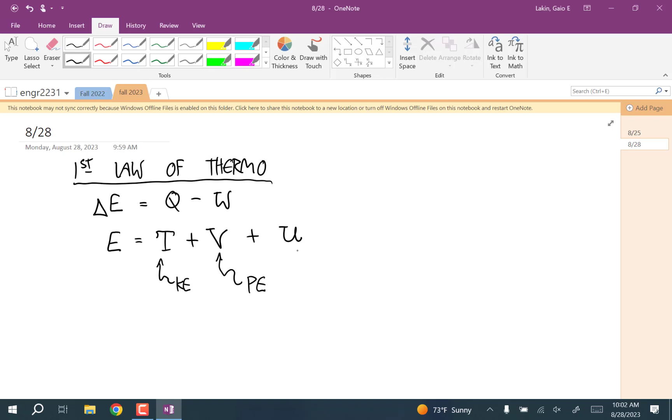Remember that E is equal to the kinetic energy plus the potential energy. This is the kinetic energy, this is the potential energy, and this is the internal energy. This has to do with just molecular motion. Often, the change in kinetic energy and the change in potential energy are going to be small, and we're going to ignore them.

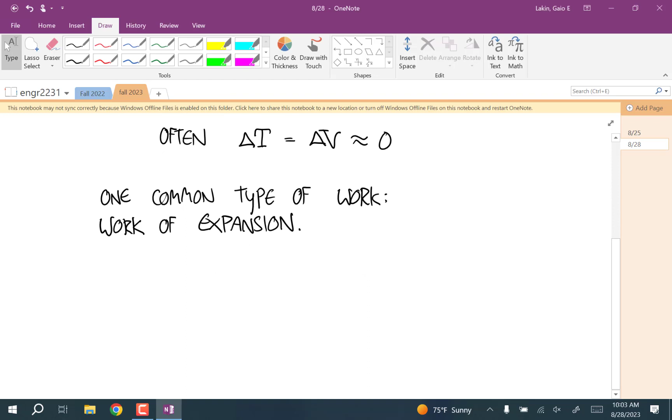One type of work that we're going to see all the time is the work of expansion. If your system expands, it does work on the surroundings. Think of it this way: almost all the time, everything that we're doing, we can think about as happening in a piston and a cylinder.

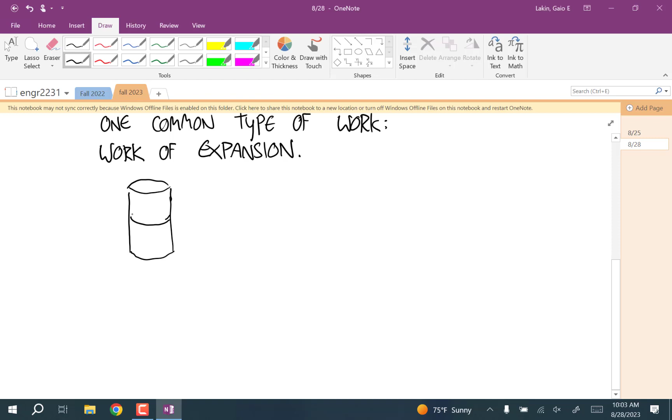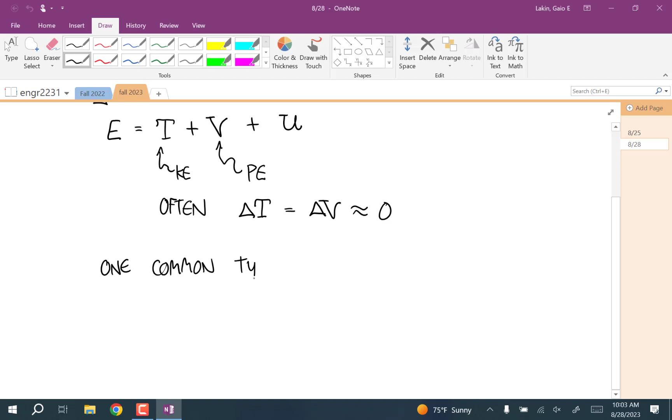Okay, one common type of work is the work of expansion. So if you think of a piston in a cylinder, this is the gas that's our system. If that gas expands, that piston rises, and that does work on the surroundings. If the surroundings push that piston down, then that compresses the gas. That does work on the system from the surroundings, and that would be a negative W. So if the gas expands, W is positive based on our sign convention. And if the gas contracts, is compressed, then W is negative.

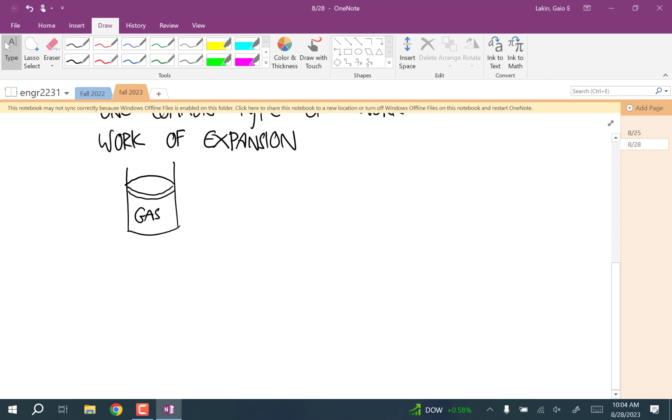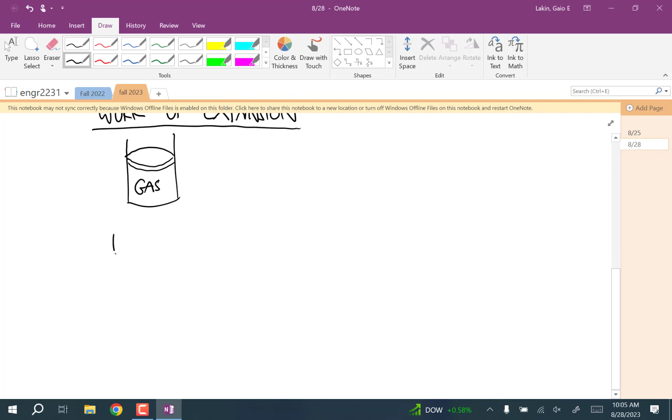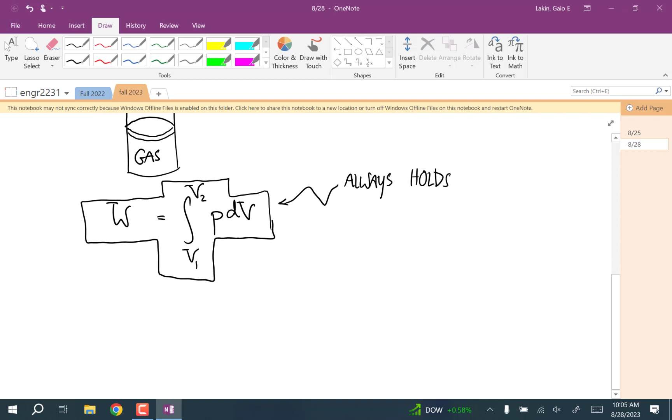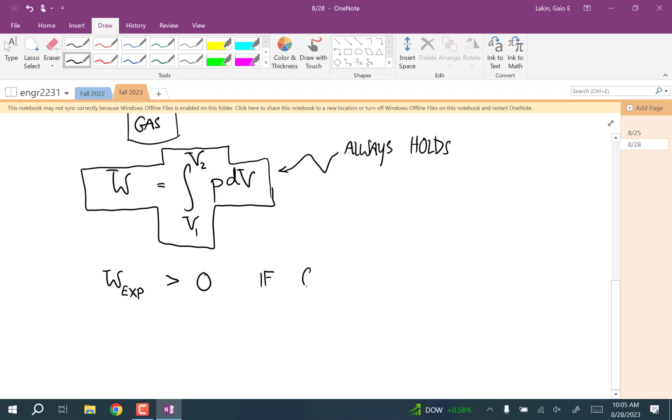The work of expansion is given by the formula: work is equal to the integral from the starting volume to the ending volume of P dV, pressure d volume. And this will always hold. Notice that the work of expansion is positive if the gas expands.

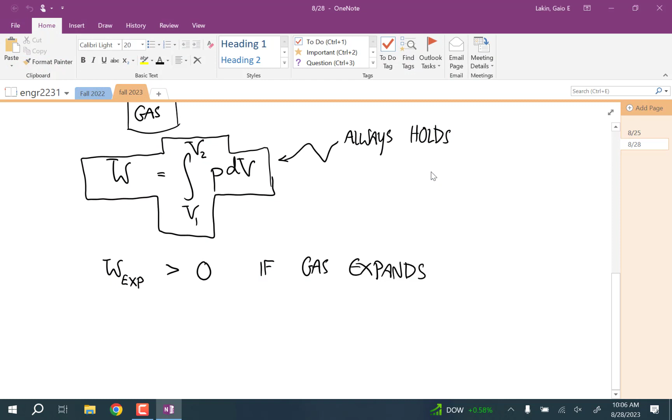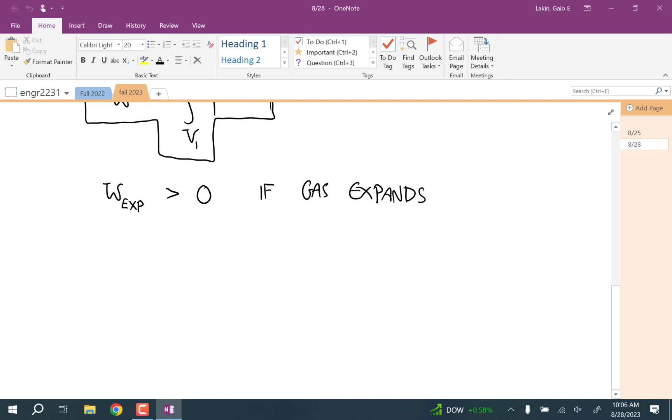Well, we'll see. Okay, so the work of expansion is 0 if the volume is constant.

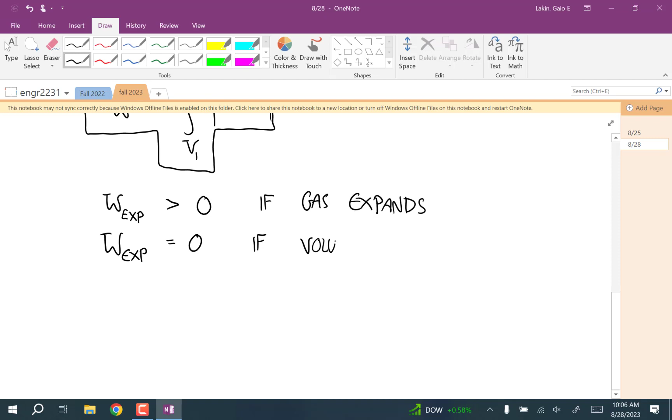And the work of expansion is negative if the gas contracts, if the volume gets smaller. You can just see that from the form of this integral. Pressure is always positive, you can't have a negative pressure.

In the assignment I gave you last time, you had to do that thing with gauge pressure. But in all of these kinds of calculations, in all the formulas, we're talking about absolute pressure. Remember the gauge pressure thing in the assignment that I wrote? In gauge pressure, you can have negative pressure - you can evacuate a chamber, and then the pressure inside the chamber is negative compared to 0 at atmospheric pressure. But in absolute pressure, you could have 0 pressure if there are no molecules of gas inside there, but you can't ever be negative. So this pressure is always 0 or positive.

And so you can just see what happens if it expands. You're integrating a positive thing from a smaller volume to a bigger volume, and so on. You can just look at that formula and see the way that works.

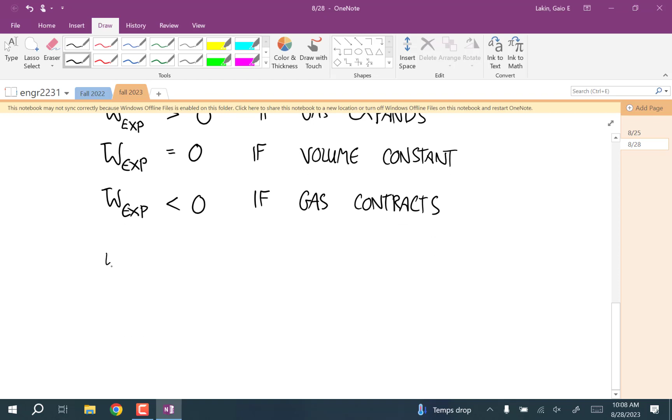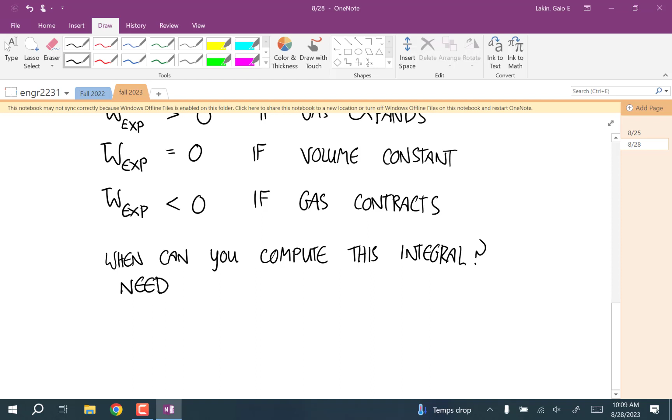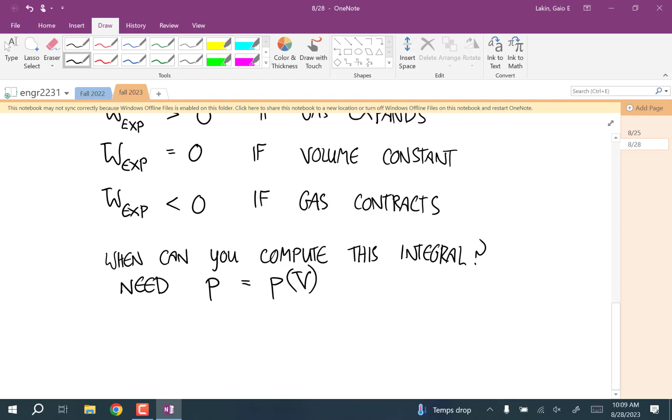Okay, so you're not super used to taking integrals with your independent variable being volume. When can you calculate this integral? When can you compute this integral? In general, the answer is you need to have P, pressure, expressed as a function of volume. The easiest case is when the pressure is constant.

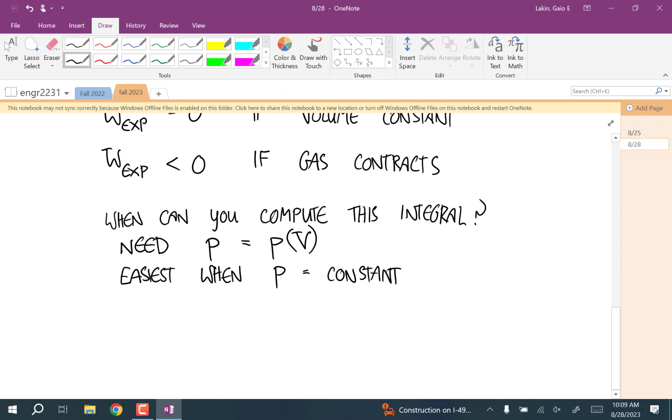So now this seems like an okay time to talk about how, throughout this class, we do calculations where the pressure is held constant, the volume is held constant, temperature is held constant. Later on we'll get things like no heat transfer and stuff like that. So let's think about how those things happen physically. Mathematically, yeah, let's say the temperature is constant - but how would you really set something up to make that happen? So, experimentally, how do you hold variables constant?

The easiest one is holding volume constant. You just use a fixed tank. This is for a gas. Any gas that you use is going to expand to fill whatever tank it's in. So if you have a fixed volume for the tank, it's holding your volume constant.

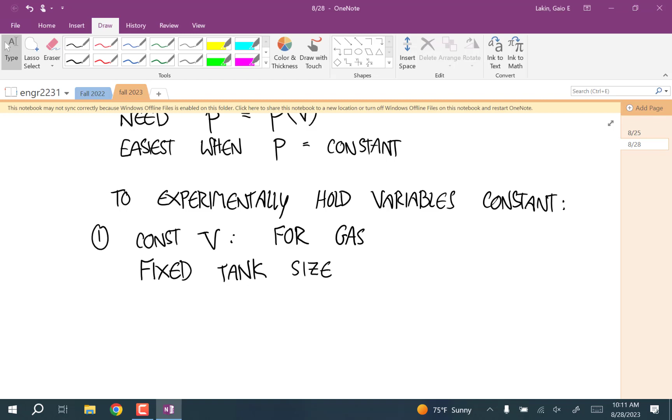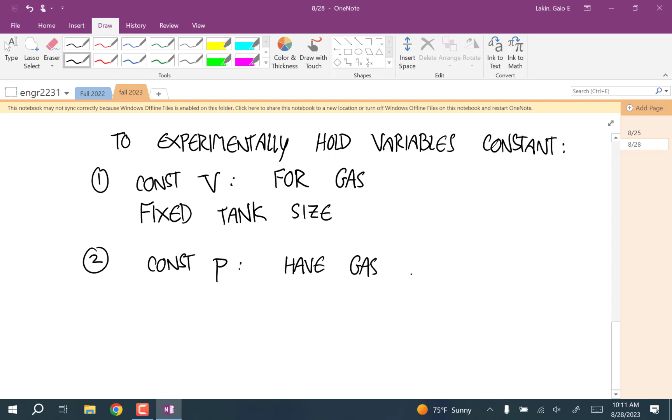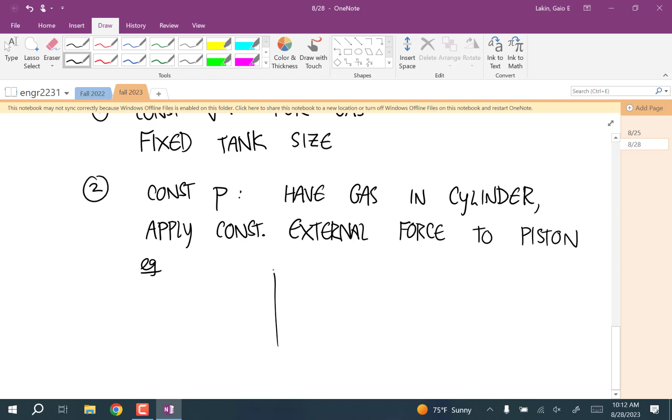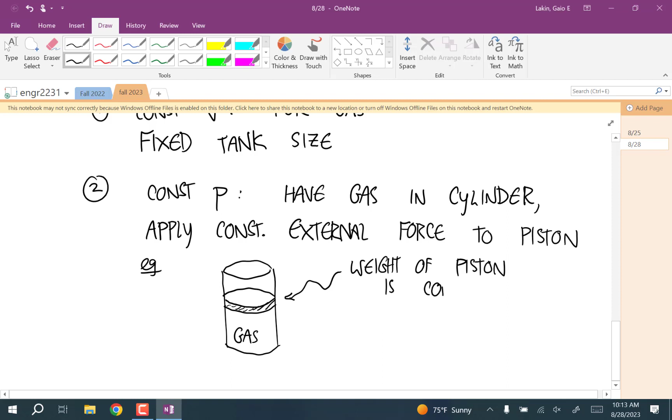To hold pressure constant, imagine having your gas in a cylinder and apply a constant external force to the piston. One example of that would just be using the weight of the piston. So for example, if this is your cylinder and this is your gas, the weight of the piston is the constant force. So that gas, depending on what happens to it, can expand or contract. But the whole time, the pressure it's fighting against comes from the atmospheric pressure and the weight of that piston, and those will be constant even as that piston is going up and down.

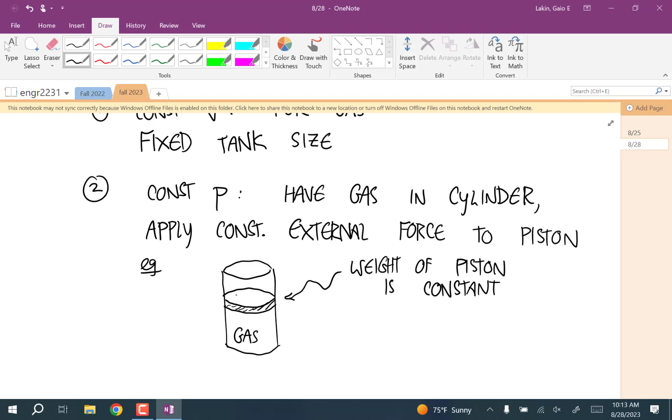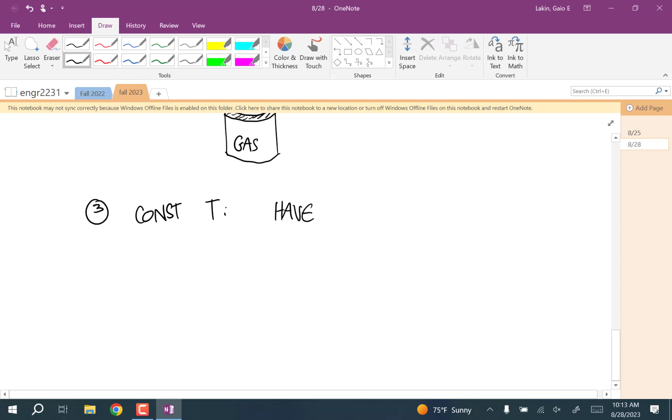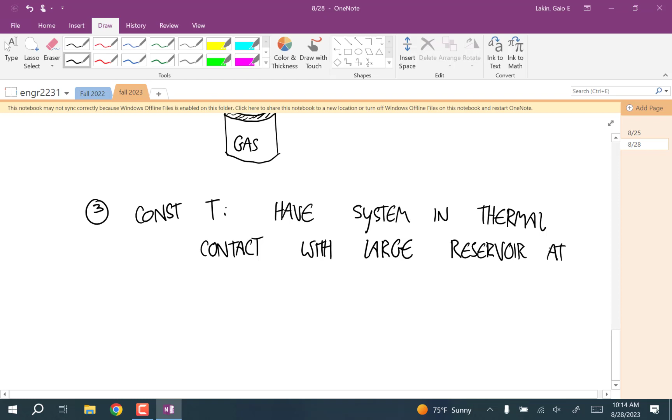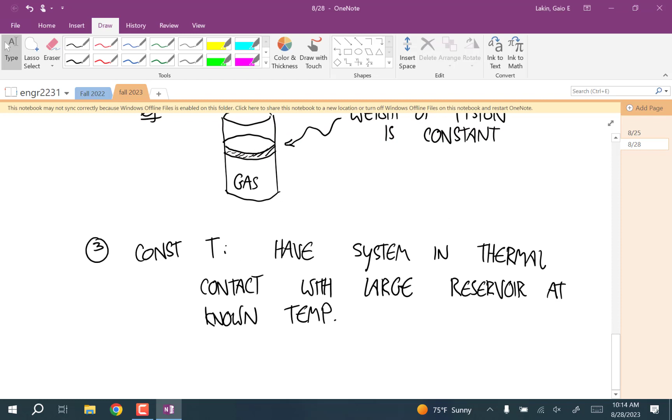And then the last one is to hold temperature constant. Have the system in thermal contact with a large reservoir at a known temperature. So think about what would be an example of that. You could think of it again as a piston and cylinder. Think about having the piston made out of a material that transmits heat easily, and you do your experiment slowly enough that heat can transfer back and forth as the temperature in the gas starts to rise or lower.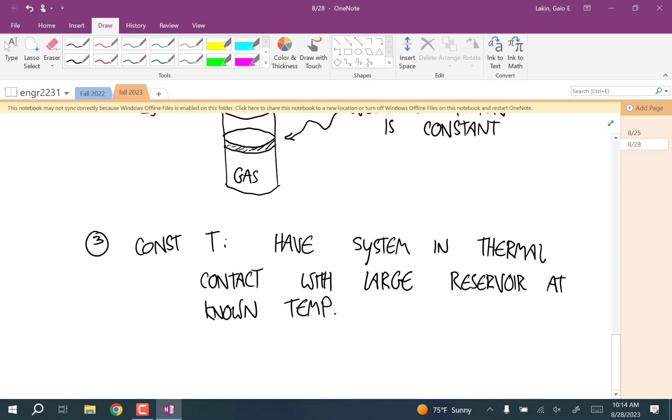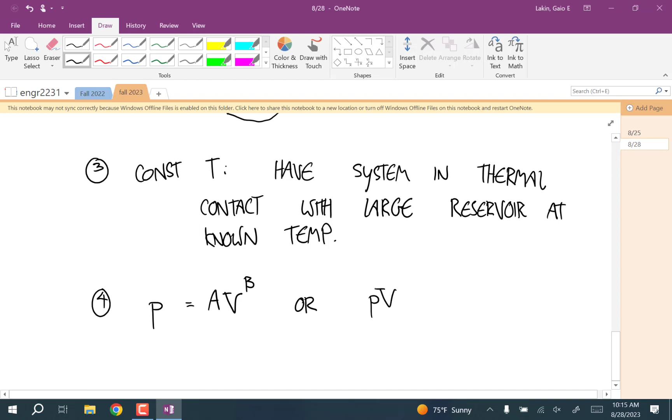And then the last thing, this isn't really constant, but we will see this from time to time: cases where the pressure is equal to some constant times the volume to some exponent, or it can also be expressed as P times V to the something equals a constant. These are just different ways of writing the same relationship. But what's going on in cases like these? Remember that these are just representing experimental findings for one specific type of process, for a specific process.

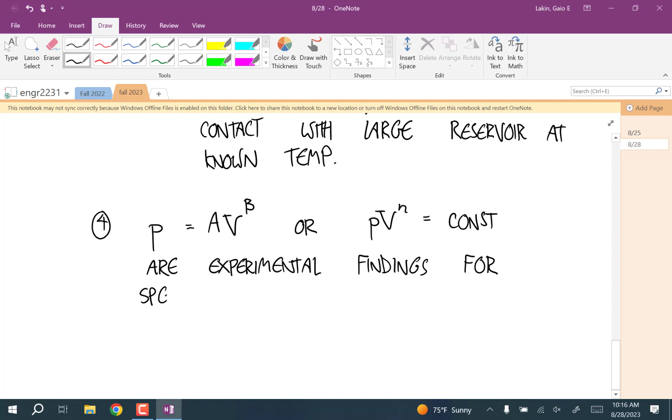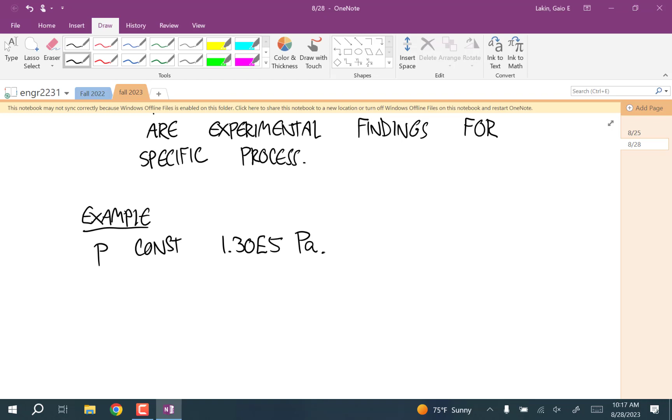Okay, let's do some example problems, just to get used to using the work of expansion formula and the first law. First, let's say that the pressure is constant at 1.30 times 10 to the fifth pascals. How do you hold the pressure constant? The cylinder or piston is able to move, and the weight of the piston is holding it down. Right, or any other force, as long as something is applying a constant force, like 5,000 newtons, that's fine too. Weight is one way to do it. And 1.3 times 10 to the fifth pascals, is that higher or lower than atmospheric pressure? Higher, a little bit. Yeah, 1.01 times 10 to the fifth is standard atmospheric pressure.

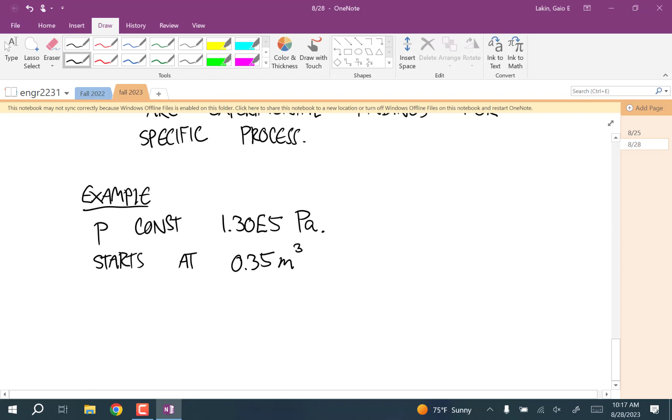Okay, so let's say that the volume starts at 0.35 cubic meters. Then the temperature is reduced in the gas, in the system, and the volume decreases as a result. If the temperature in the gas is reduced, is the volume going to increase or decrease? Decrease, yep. So the volume is decreased to 0.20 meters cubed.

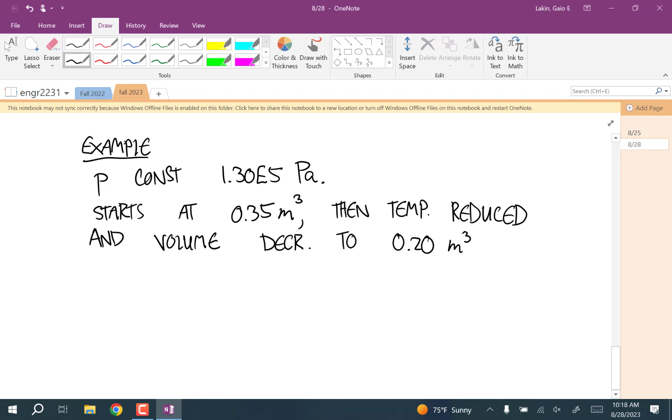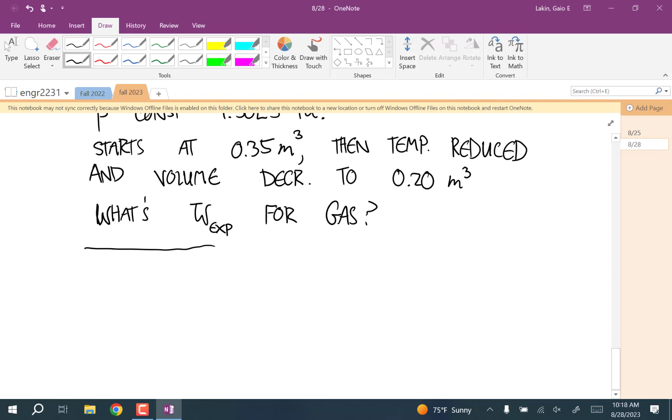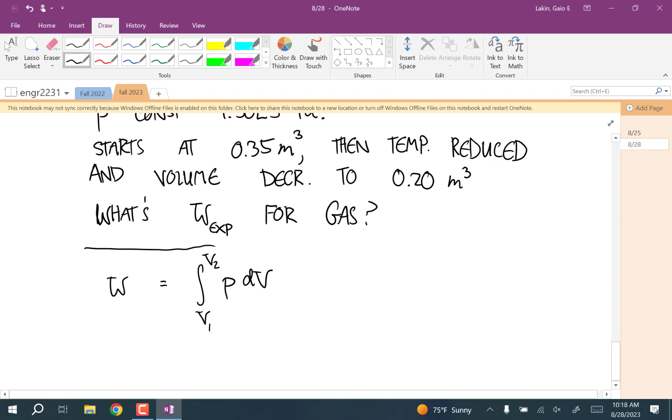What's the work of expansion for the gas? The formula says that the work of expansion equals the integral from the starting volume to the ending volume of pressure times dV. This is the easiest case because we have constant pressure. So this is going to be the integral from... nope, I did it backwards, the starting to the ending, so 0.35 to 0.2, of 1.3 times 10 to the fifth, dV.

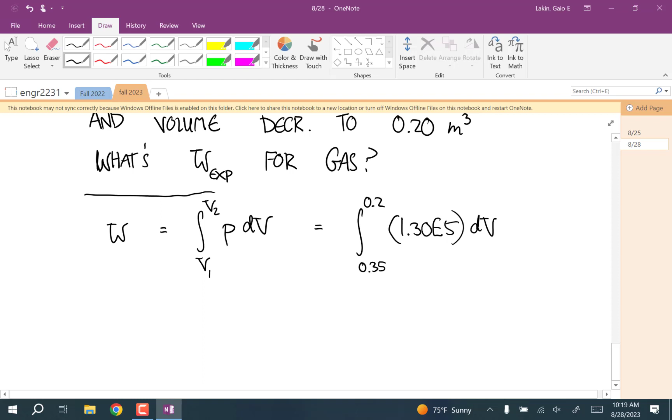So take that integral and you get 1.3 times 10 to the fifth times V, evaluated from 0.35 to 0.2, and you get a value of negative 19,500 joules. If everything you do is in SI units, this is going to come out in SI units, that's what I'm going to tend to do in this class. Okay, does it make sense that we got a negative answer? Yeah, because the volume decreased. That's always a negative work of expansion. Any questions about that process?

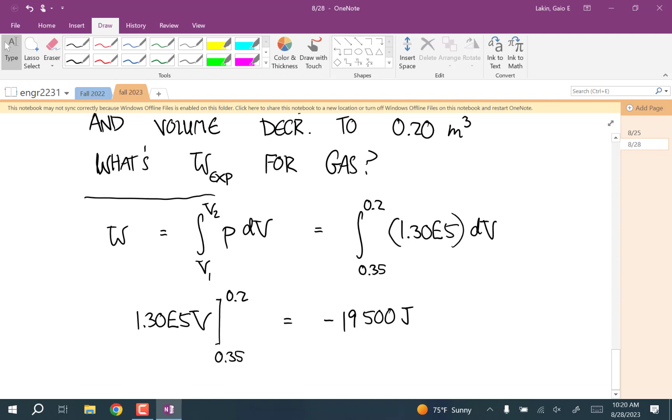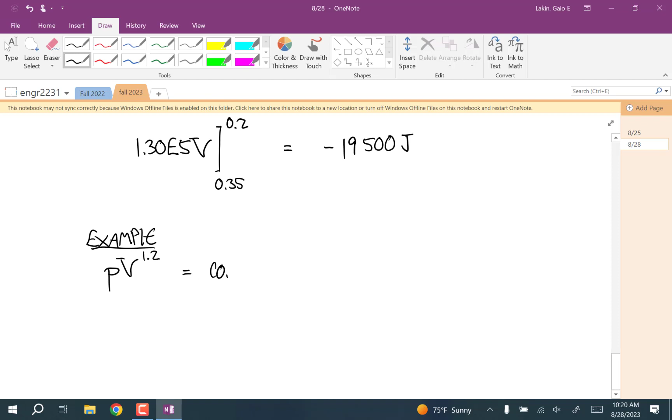Okay, so how about this one? Let's say that we know that during this process, PV to the power of 1.2 is going to be equal to a constant. At state 1, the starting state, let's say that the pressure is equal to 3 bar. 1 bar is 1 times 10 to the fifth pascals, so this is 3 times 10 to the fifth pascals. And at that state, the volume is 0.1 cubic meters.

And then at state 2, the ending state, we don't know what the pressure is, but we know that the volume is equal to 0.2 cubic meters.

What's the work of expansion? First, can we tell whether this is going to give us a positive or negative work of expansion? It's going to be positive because the volume increases. Well, so we know that P times V to the 1.2 is equal to some constant.

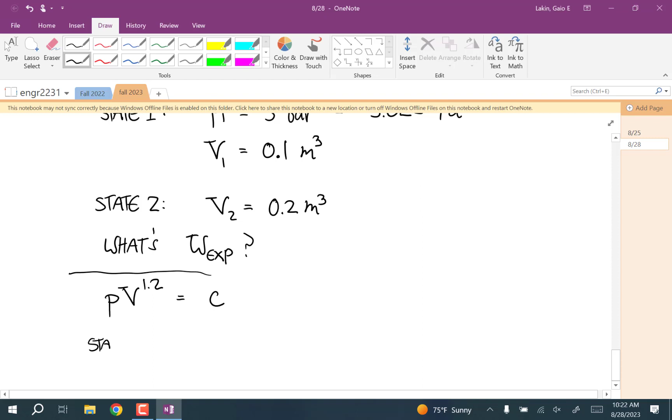I'll call it C. We don't know what C is yet. How can we figure that out from what we're given? From state 1, exactly. So state 1 says that 3 times 10 to the 5th times 0.1 to the 1.2 is equal to C.

Did I do this one? All right, so how are we going to solve this for C? Once we find C, then we know we can use this in the integral for work of expansion. Well, this is a pretty easy case. All we have to do is just calculate that number. So C is equal to

18,928.7. And so now we know that pressure times volume to the 1.2 is equal to 18,928.7.

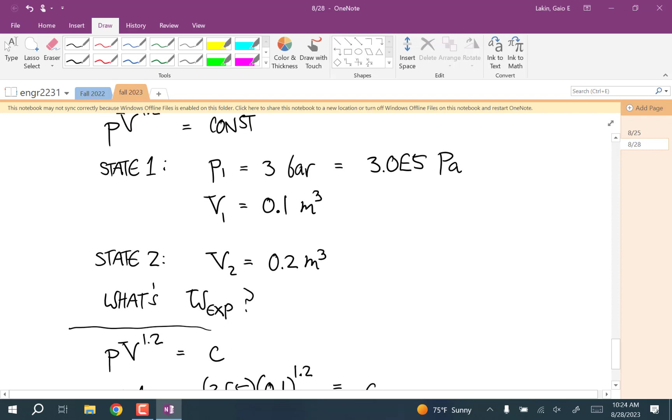Well, in order to use our formula for the work of expansion, what we need is pressure given as a function of volume. So now we can multiply both sides of this equation by V to the negative 1.2, and you get that pressure is equal to 18,928.7 times volume to the negative 1.2. You with me on that? Now we have our function, and so the work of expansion

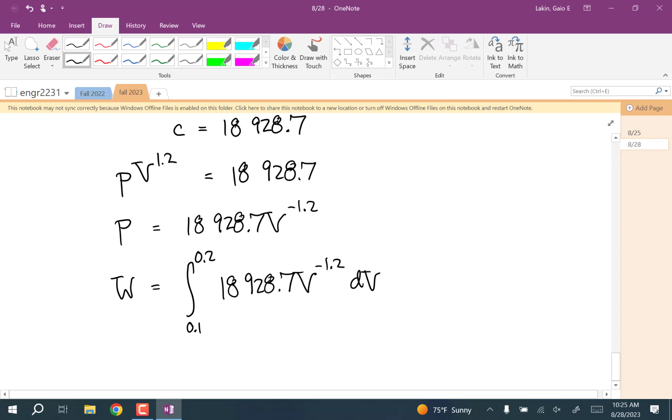is just going to be equal to the integral from our starting volume to our ending volume, so from point 1 to point 2, of 18,928.7 times volume to the negative 1.2 dV. You can pull out that constant, so this is just equal to 18,928.7 times the integral from point 1 to point 2 of V to the negative 1.2 dV.

And so this is equal to 18,928.7 times V to the positive, negative 0.2, over negative 0.2. So that makes this whole thing negative. Evaluated from 0.1 to 0.2.

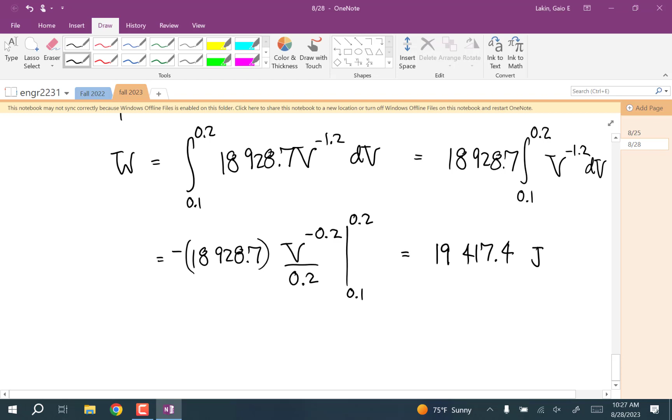And if you do that evaluation, you get, because this exponent is negative, you end up with positive 19,417.4 joules, which is a positive work that goes along with the expansion of the gas like we knew from the start. Okay, so practically speaking, you're going to have to deal with these exponent rules quite a bit on this kind of stuff.

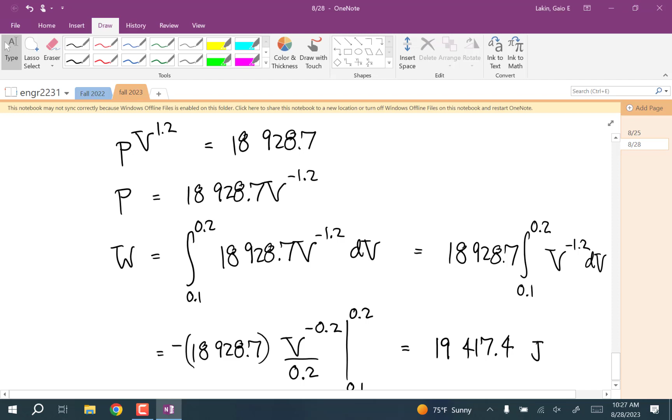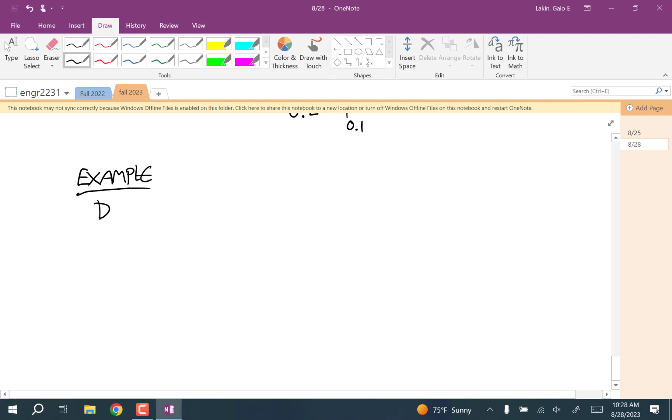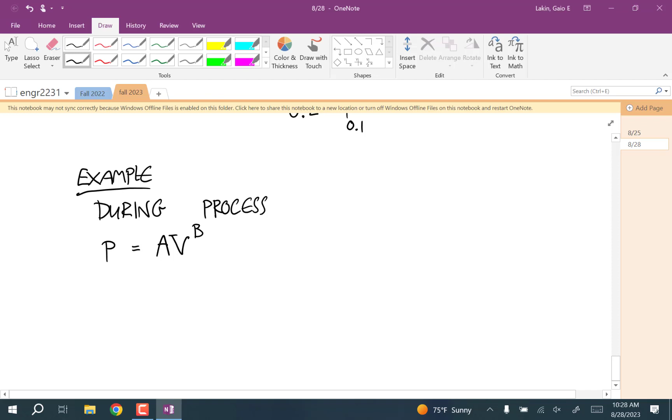Okay, so let's say now, let's do another one like this. Let's see. So let's say, wish I had them written out. So let's say that there's a process where we know that pressure is equal to some constant times V to some exponent, and 200 joules of heat is added.

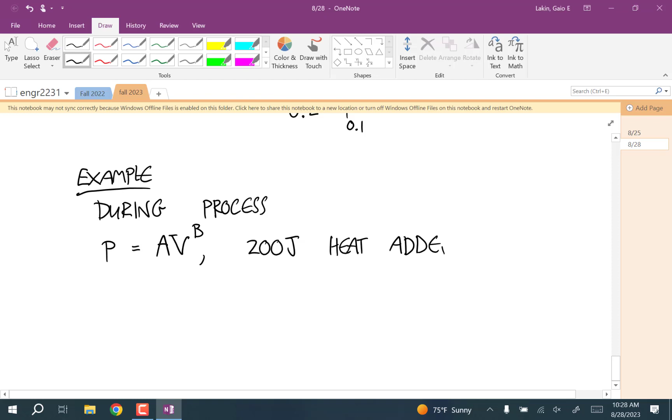And let's say that it goes from a pressure of 2 bar, which means 2.0 times 10 to the 5th pascals, and a volume of 0.3 cubic meters. And it goes to a second state where the pressure is 0.5 bar, and the volume is 1.5 cubic meters.

Let's say that there's no change in kinetic or potential energy. What's the change in internal energy of the gas?

Okay, so let's think through how this is going to go, and then step by step I'm going to give you time to work on these and see if you can get through them. In the last example, this exponent relationship between pressure and volume, we knew the exponent from the start. We just didn't know what the constant of proportionality was. This time there are two things we don't know. What's different about this problem setup that's going to allow us to calculate both of those versus just the one in the last example?

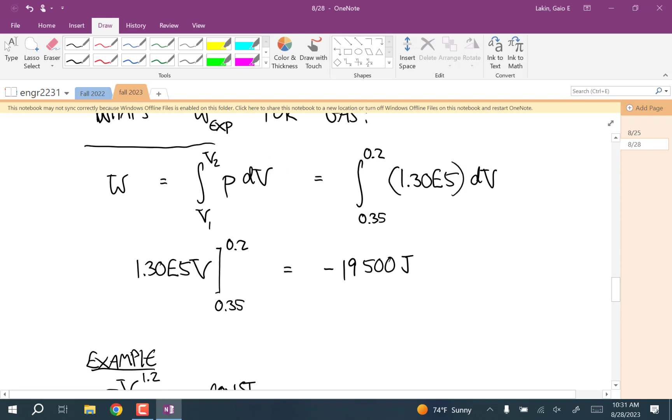There's one extra bit of information that we have here that we didn't in the last one. That's right, exactly. In that first example, we had the pressure and volume at state 1, but only the volume at state 2. In this example, we have the pressure and volume at state 1 and the pressure and volume at state 2. So the first step is going to be to find that relationship, to calculate A and B. Okay?

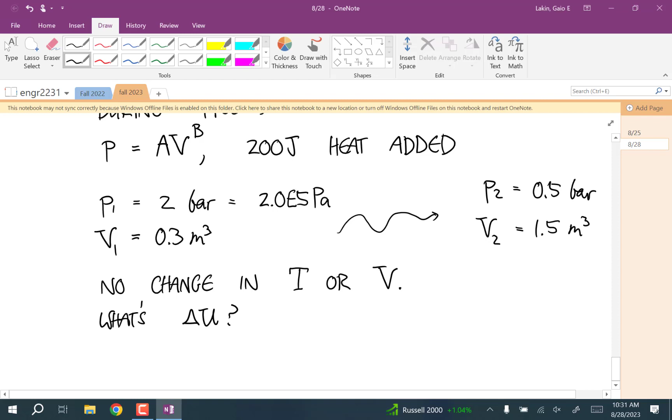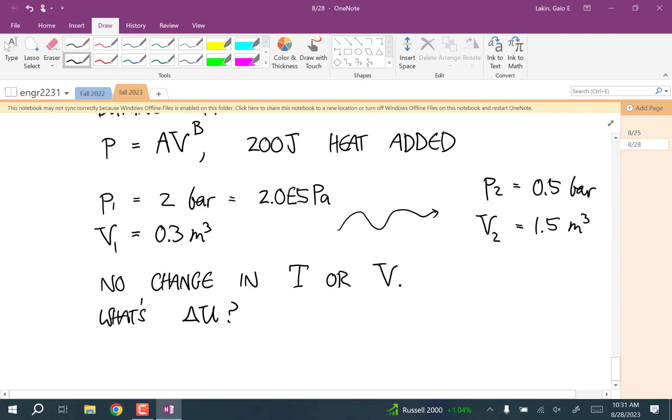After we do that, we can calculate the work of expansion. And after we calculate the work of expansion, we have everything we need to plug this into the first law of thermodynamics and find that internal energy. Okay?

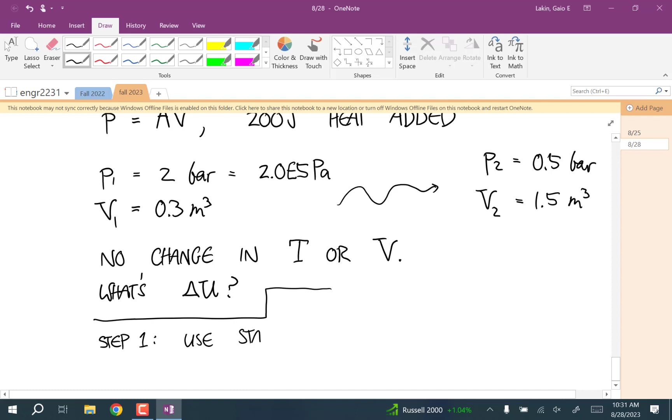So, step one, use states 1 and 2 to calculate pressure as a function of volume. Okay, take a few minutes and see if you can work through that. It won't be so bad, but let me just go through this first step. Okay, so we have that

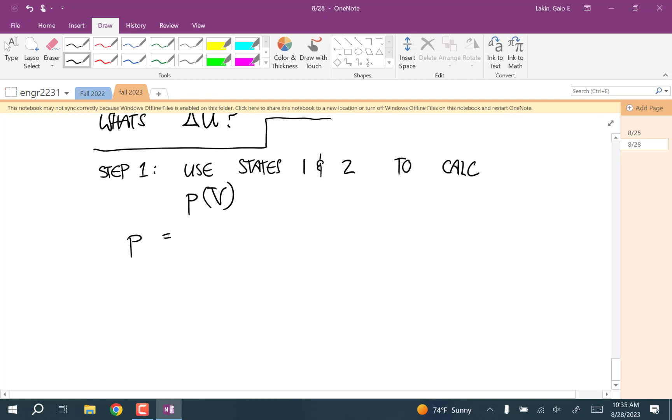pressure is equal to A times volume to the B. So A you can think of as, let's see, so A you can think of as pressure over V to the B.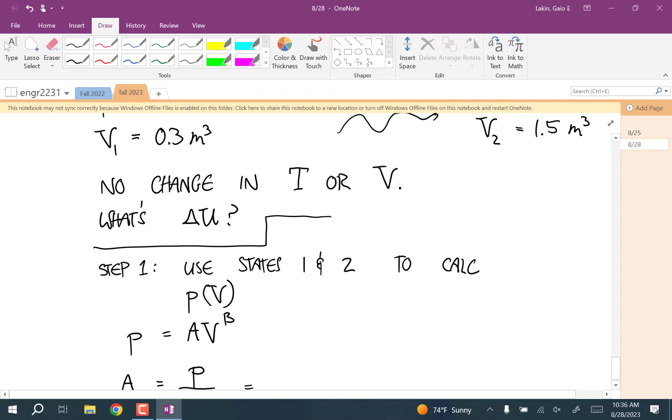And now we can plug in these two states. So the first state, A is equal to 2 times 10 to the 5th divided by 0.3 to the B. So this is from state 1.

And then at state 2, we have that A is equal to 0.5 times 10 to the 5th divided by 1.5 to the B.

And these two things are equal, so we can set 0.5 times 10 to the 5 over 1.5 to the B equal to 2 times 10 to the 5 over 0.3 to the B. Okay, so now we're starting to get somewhere.

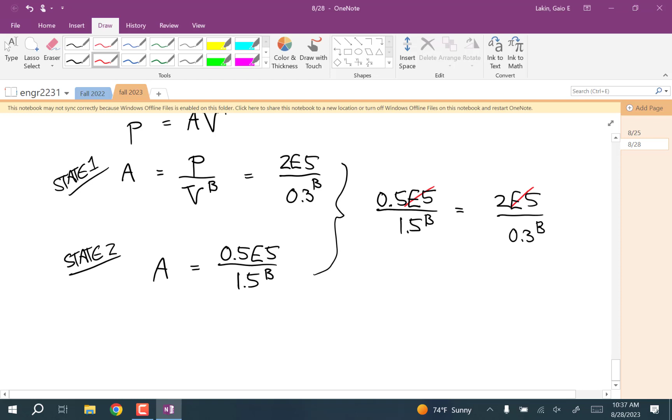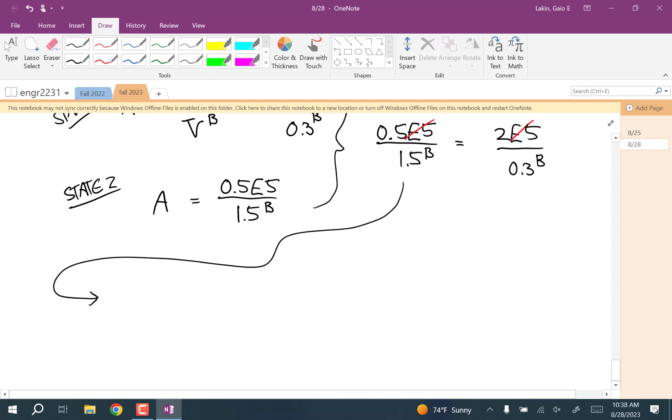You can divide both sides by 1 times 10 to the 5th. So now 0.5 over 2, we have 0.25 on the left side is equal to 1.5 to the B over 0.3 to the B.

And we can write this as 0.25 is equal to 1.5 over 0.3 all to the power of B. And so 0.25 is equal to 1.5 divided by 0.3 is 5.

Now you can take the natural log of both sides. And remember, the thing about natural log is the natural log of 5 to the B is equal to B times the natural log of 5.

So B is equal to natural log of 0.25 divided by the natural log of 5. And you get a value of negative 0.861. Okay.

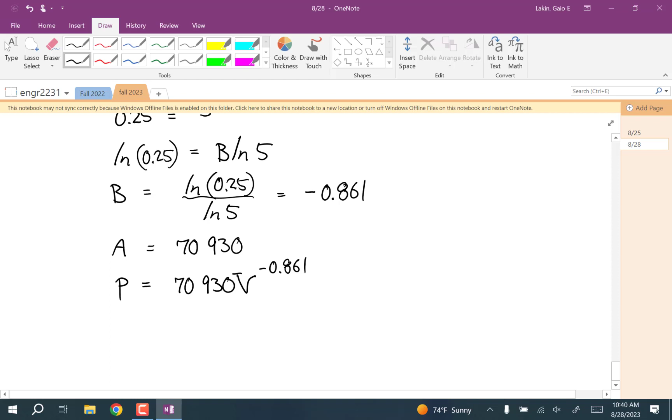And so pressure then is equal to 70,930 times volume to the negative 0.861. Okay, that step is out of the way.

The next ones are mathematically much simpler. So now take this and calculate, you know, the second step is to calculate the work of expansion by computing that integral. So take a couple minutes and do that.

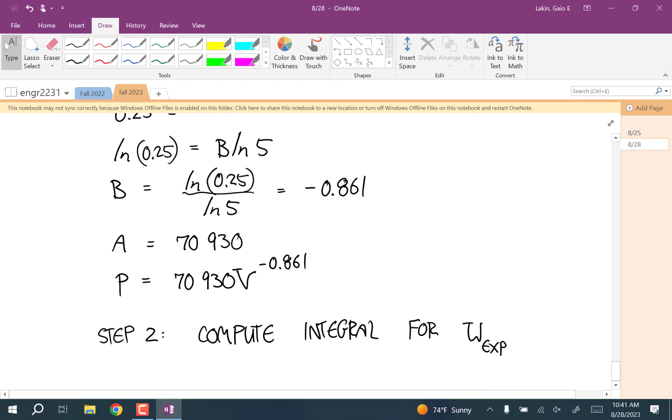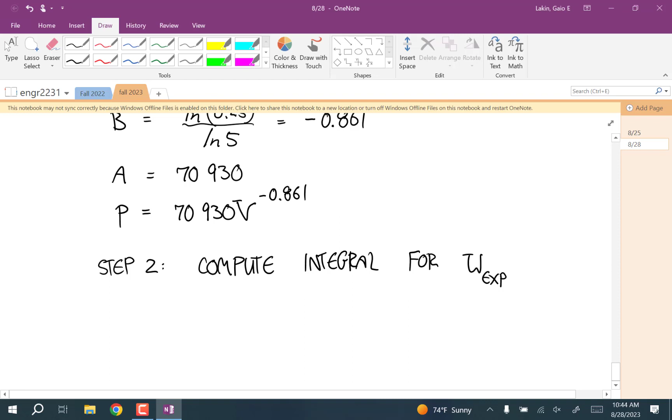And ask yourself, do you expect this answer to be positive or negative, first of all? That you can just get from looking at the volumes at the start. The volume's increasing, so this gas is expanding, and so we expect our integral to come out positive.

So the work of expansion is the integral of P dV. So I can write this as, I can pull out the 70,930 outside of the integral. And we're going from volume 1 to volume 2, so 0.3 to 1.5. All these are in SI units, remember. Times volume to the power of negative 0.861 dV.

And so this is equal to 70,930 times volume to the power of positive 0.139 divided by 0.139, evaluated from a volume of 0.3 meters cubed to 1.5 meters cubed.

And if you evaluate that, you get 108,181 joules. Did anybody get that? Good. A little bit off, but I kept the... 0.23. Okay. Yeah, right. Great.

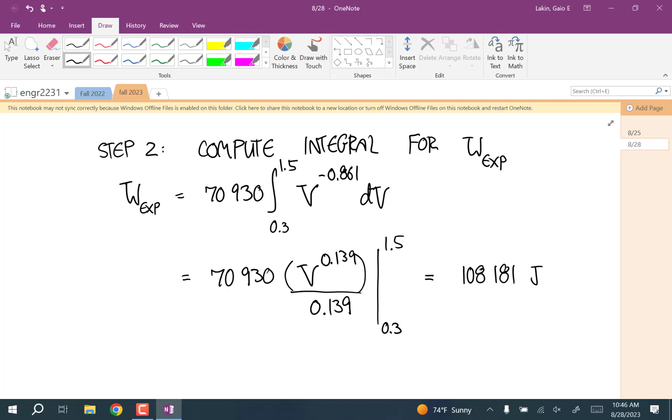Okay, and then the final step. Why don't I just do this just because of time? So step 3. Now we're trying to figure out the internal energy change. We're going to use the fact that, so this is the first law of Thermo, says the change in the total energy is equal to the heat added to the gas minus the work done by the gas.

Our total energy of our system is the kinetic plus the potential plus the internal energy. And the problem said that we're going to ignore the changes in these, so we don't have to think about those at all. The other thing that it said in the setup to the problem is that 200 joules of heat is added.

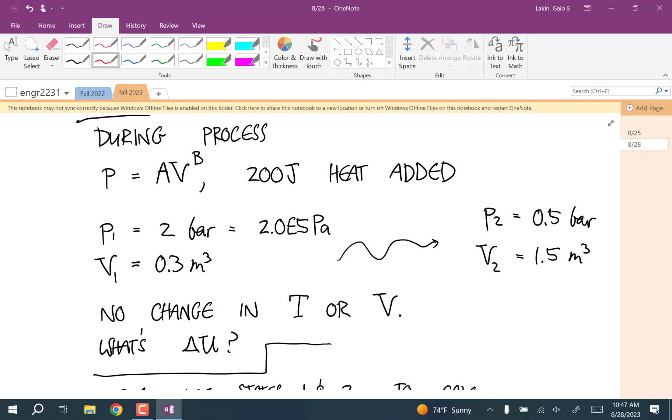Okay? So you have to think 200 joules of heat is added. Is that a positive Q or a negative Q? It's positive, yep. So, we have that the change in internal energy is equal to 200

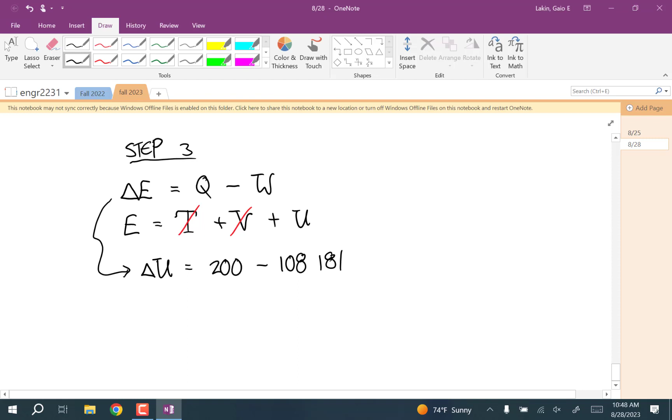minus 108,181. And so the change in internal energy is negative 107,981 joules. Okay? And that's how much the molecular motion of the gas decreased energy-wise due to these changes that happen.

Any questions about that? Okay, that's it for today. So I'll give you some first law problems and some problems that use that work of expansion integral.